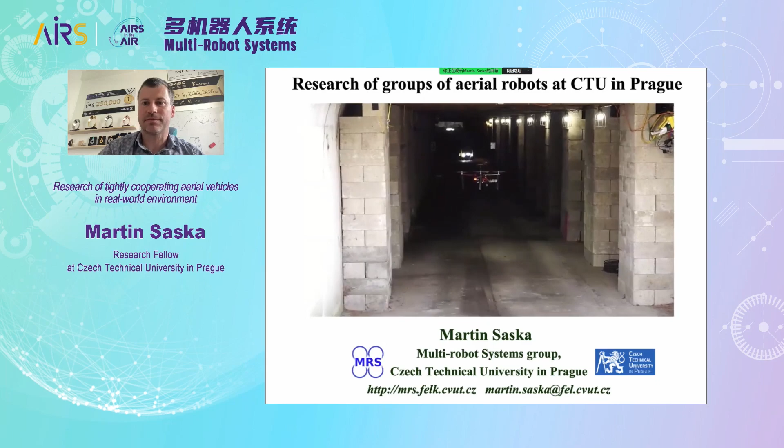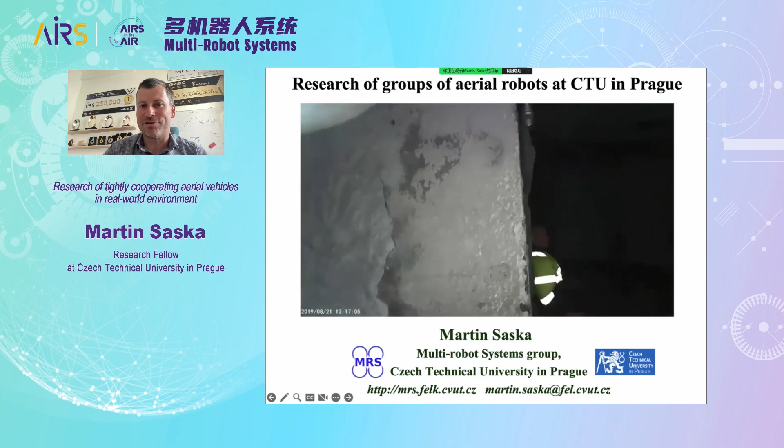Hello everybody, thank you very much for the nice introduction. Thank you very much for inviting me to this interesting workshop. I hope my presentation will be interesting for you, and you will learn something about what we are doing in Prague and what other researchers are doing in this field. So let me share the screen. I hope you see my slides and the video running. Can you confirm please? Perfect, thank you. Please, in case you have any question, feel free to interrupt me. I like to see if the audience is not sleeping and following me. These remote presentations are kind of, I don't want to say boring, but maybe more boring than being in person. So unfortunately I cannot be with you, I would like to be. Hopefully next time I can be in your place and present to you directly.

So let me start my presentation. As the title of my presentation says, I would like to show you briefly what we are doing in Prague in the research of multi-robot systems.

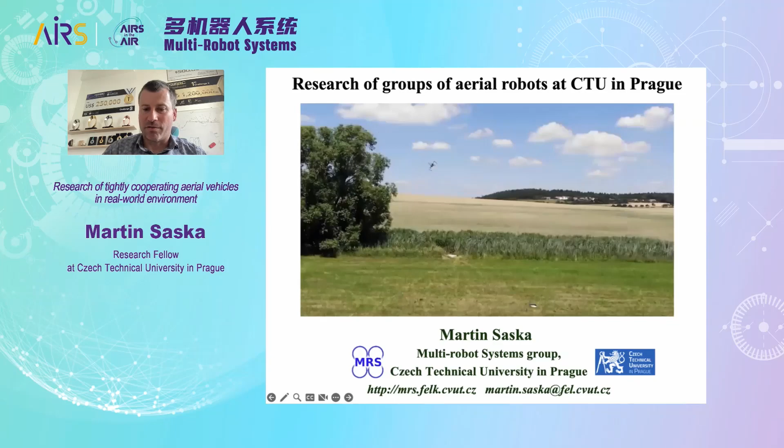I'm heading a group of... why it's not moving... okay, now I'm heading a group of 35 employees in Prague, plus we have a huge group of master and bachelor students. So altogether we are more than 80 people cooperating on our robots, and we have the ability to cover really all the disciplines required to build a complete system of fully autonomous drones.

So all the videos and all the pictures you will see, the drones are flying autonomously without any pilot, without any operator, even without communicating into a ground station. So they are really independent robots using onboard sensors, onboard computational power, and onboard artificial intelligence. And we try to deploy these robots into real world environments.

So we don't have even a flying lab where we could fly inside in our lab or even outdoor at our campus. We don't have any place purposely. We want to fly really in the real conditions. So we travel a lot to nature, to cities, to industrial complexes, always where the drones need to be deployed.

Here you can see also a kind of wall of fame. We are proud of successfully participating in multiple robotic competitions. I will briefly tell you about it a bit later.

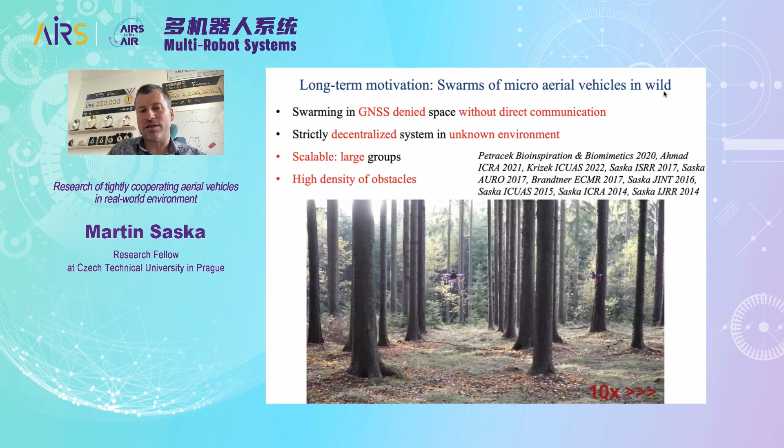We want to have our groups of robots scalable. Therefore, we try to apply bio-inspired methods. We try to be inspired by birds and fish schools and a flock of birds and insects, to use these principles to be able to fly similar to how these guys are doing.

I don't know why it's not so well working today. We are proud of our system. We have designed it for controlling multiple robots. We call it the MRS UAV system. It has now more than 600 active users. You can find details in this publication.

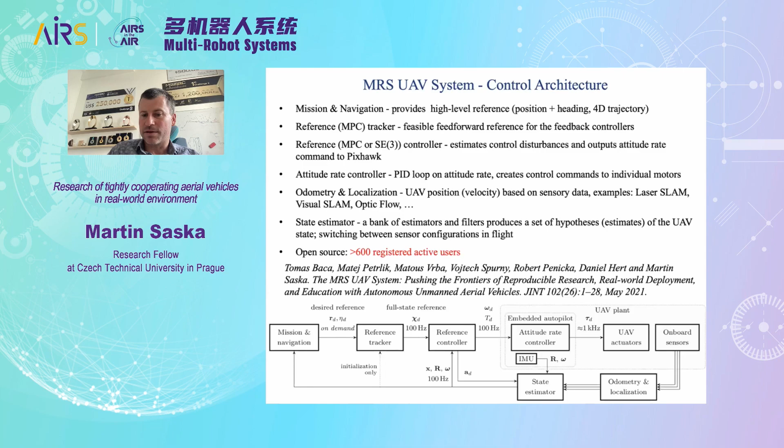Part of the system, or the main part, is the control part, where we have multiple controllers you can choose from. We are using the SE3 controller or MPC, model predictive control. We have embedded there multiple trackers for tracking of trajectories or desired references the drones are using. We have there also the possibility of fusing multiple sensors.

As I have mentioned, our robots are using onboard sensors mainly. So they can be equipped with cameras, 3D, 2D lidars, radars, a lot of different sensors, 3D cameras. And often we try to combine, fuse multiple of these sensors together to get a reliable output. Because the state estimation for the robots is, of course, crucial. The robot needs to know its state to be able to control it, and therefore our researchers are also focused in this particular area.

As I have mentioned, we have multiple controllers there, the MPC and the others. But I would like to focus on a unique sensor, a smart sensor we have developed here in Prague, which is intended for large swarms of robots in real world conditions.

We are using UV LEDs mounted on robots. We have selected the UV part of the spectrum because RGB cameras are sensitive to illumination. We have found, and you can see the example in the picture here on the right, that in the RGB spectrum, it's really difficult to find the drones around, even if you are using advanced AI methods, neural networks, and this kind of stuff.

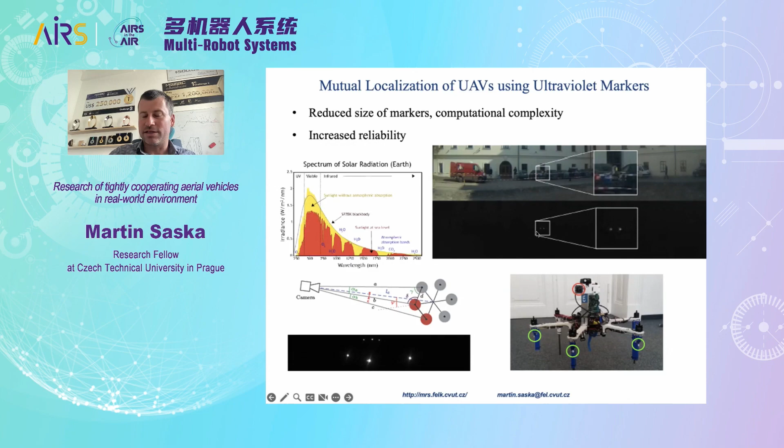Therefore, the sun is not providing this part of the radiation, and it's not reflected from the objects. That's why in this picture you can see really only these two bright dots, which is the drone equipped with this UVDAR system. So detecting these bright dots, we can simply detect the drones around, track them.

And even communicate through blinking of these UV markers. So we can have a simple indirect communication where each drone can blink, for example, their status, informing the other robots that the drone is landing and so on.

Another interesting research we are conducting right now is trying to use swarm intelligence for solving situations where one of the robots, or a few robots from the team, is kind of blind. So you may imagine flying above, for example, a desert where you have sand everywhere, relying on cameras. Obviously there are no obstacles in the desert, so you cannot use 3D lidars to localize the drone.

But of course, above the desert, there are places where the sand is consistent and you can't see any stones, anything, any object. In this particular situation, your drone would be completely lost, and you would even lose the state estimation of the velocity, which is crucial for the drone, and the drone would collide immediately.

But we have found that by using multiple robots in the team, and helping robots which are better localized help the poorly localized one, as you can see here, this robot can improve its own localization performance, and all the robots together can fly.

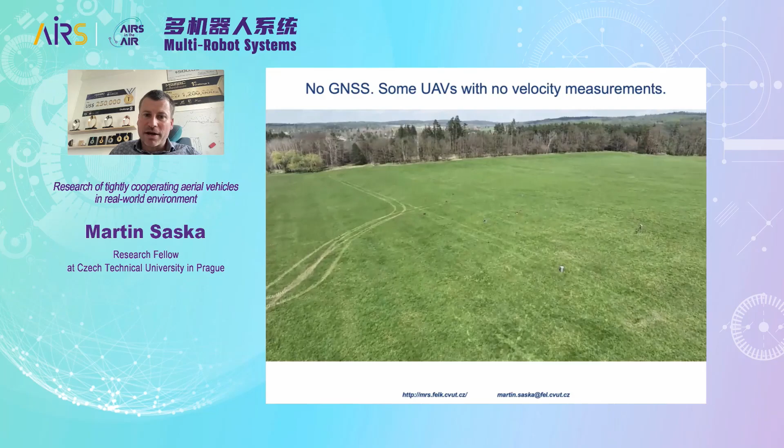So they are not using GPS, they are not using communications, they are just observing each other. We have even found some locations above this grass where particular drones are completely losing track - they're not able to be stabilized because the green under them is persistent and without enough visual features. But even in these regions, the swarm stays stable, flying really fast.

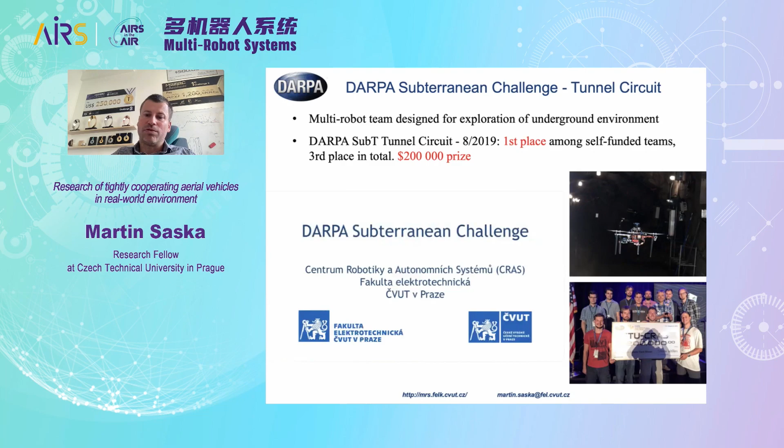And also, you can imagine that such a swarm is difficult to hack. For example, you can't spoof GPS because we are not using GPS, and you cannot spoof the communication because we are not using communication. It's really interesting research to exploit the fact that we are flying in the swarm to help the individuals.

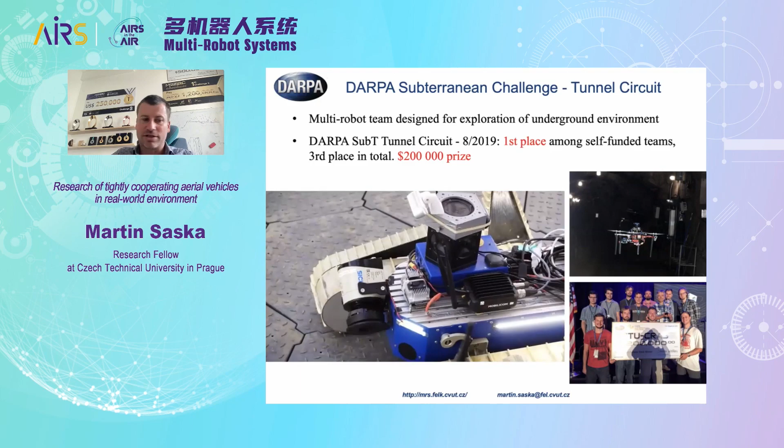Now let me briefly tell you some lessons learned during our deployment in the DARPA subterranean challenge. It was a really great challenge because it pushed the research to the edge. The aim of this competition was to find victims in an underground environment. We, as operators of the drones or ground robots, were not allowed to enter the environment at all, so we had to send our team of robots to go there and explore.

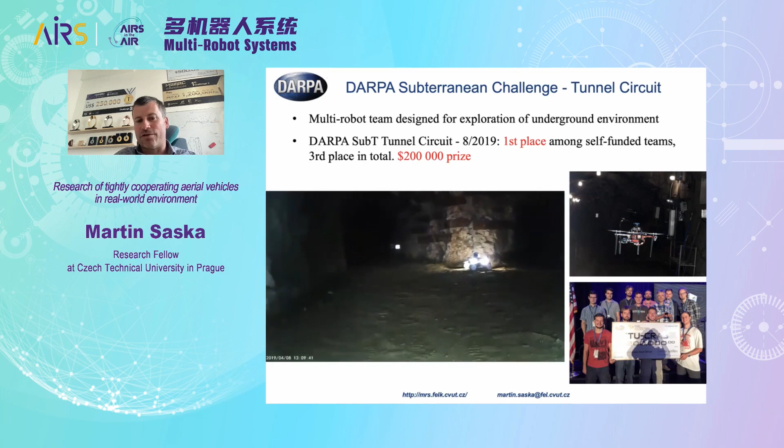We didn't even know what type of environment was in front of us - it was really unknown. Usually an unknown environment means you at least know you'll be flying in a forest, so you can prepare your drone beforehand, train your neural network for the trees around, and so on. But here we couldn't train anything - we didn't know if it would be a cave or a tunnel or how the environment would look. It was really a challenging task.

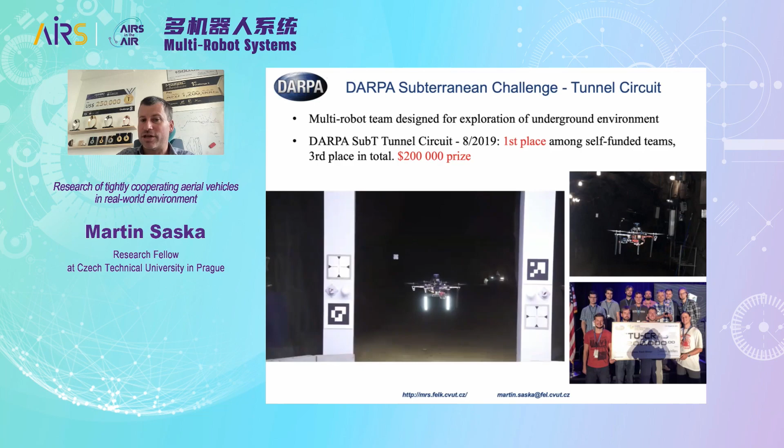We managed to win this competition among self-funded teams, and we were third overall. The same happened also in the second part of the DARPA challenge, the urban circuit.

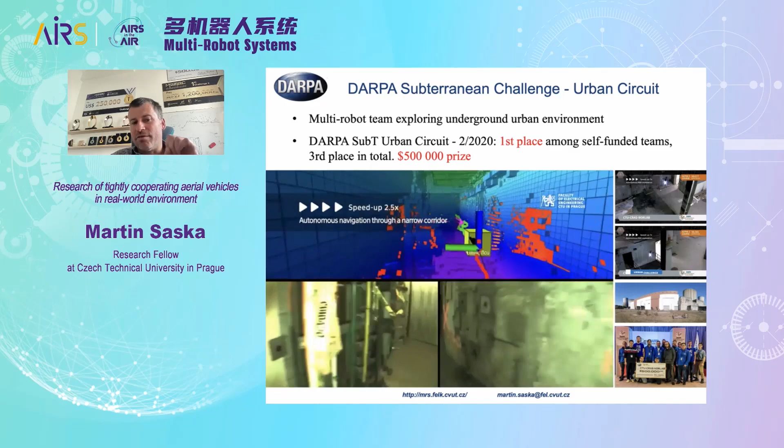It was again a similar example - we were targeted to explore the environment of a nuclear power plant. Our robots were sent into the power plant without a priori knowledge. They were flying there and we had to design the system so they were able to explore really tiny corridors, almost touching the walls with their props, as well as flying through huge areas of the power plant.

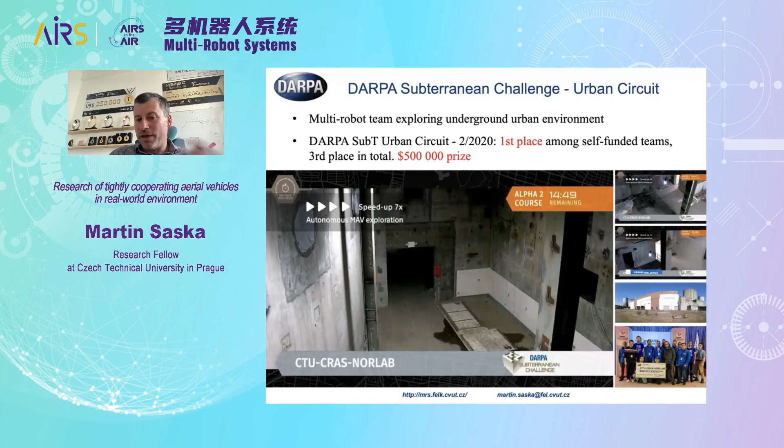So our system tried to adapt by itself just by observing the environment. This is a completely new view of robotics, where the drones observe the environment and change their behavior based on the environment's properties to be fast and efficient. In the final of the DARPA SubT, we were second overall in the virtual track, and this was really a great lesson we learned there.

It was the DARPA organizers - they built a special stage for us where the robots were deployed.

They built an artificial train station, as you can see here. So everything was built from scratch by them. They built a train station, a coal mine, and an artificial cave system. So we sent the drones there, and the drone flew into a metro station, then continued to a mine, then there was a cave. So it was really, really heterogeneous system for being deployed in heterogeneous conditions.

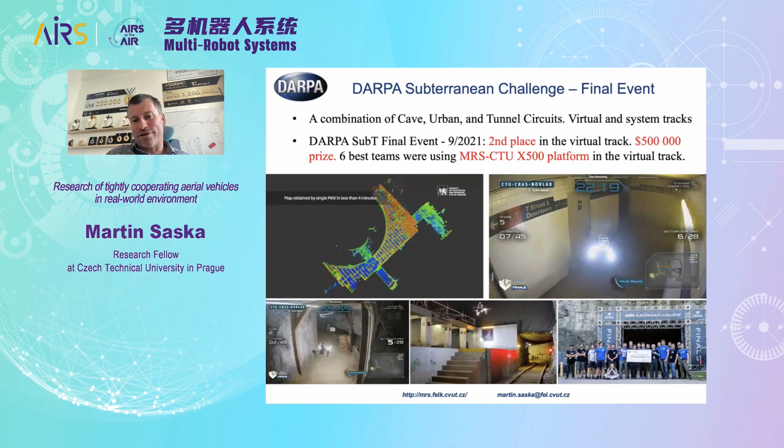So it was really something which pushed a lot the robotics, and we could see even in observing the other teams that the key issue was to design a really reliable system. So this is our main research intention right now, to build drones which are really reliable, which kind of never crash. Of course, this is a difficult task, but we try to go forward.

So as I said, the DARPA SubT challenge was really pushing the state of the art of robotics. So we managed to have a lot of publications in the best journals in our field out of the competition, which is great. And we managed to have also a lot of industrial outcomes.

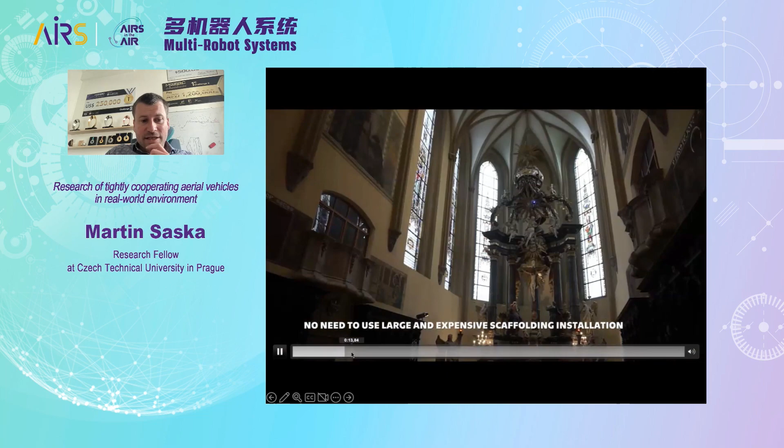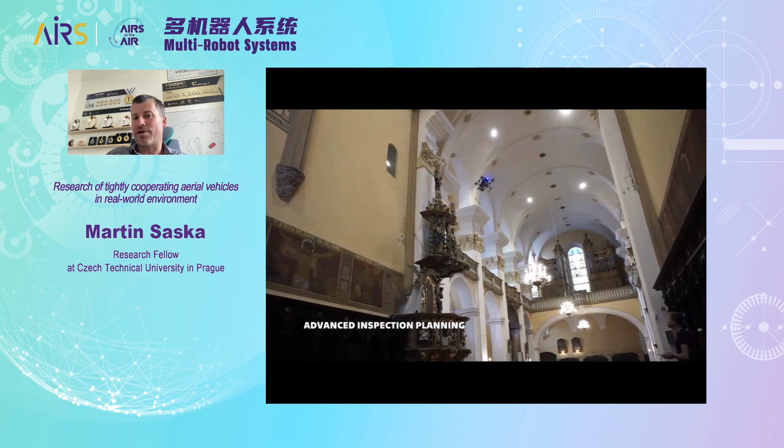The nice thing is that we have even found some applications where multiple robots being deployed simultaneously is necessary. So here in these examples, you can see that the object has insufficient illumination, the lighting there is not sufficient. So we have to deploy a team of multiple robots where one of the robots is carrying a camera, flying completely autonomously in the church, and another drone is forming a formation with the main one, carrying a light. The advantage of such an approach is that you can point the light from the side, so you don't have to put the light on the same drone as the camera, which makes much better quality of pictures. Of course, we are using also 3D models scanned by the drone.

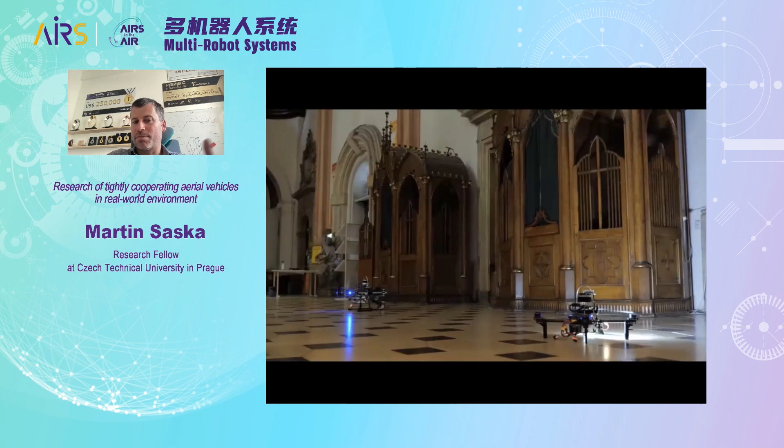These 3D models are used for the end users to plan the mission. Of course, here in this particular application, the drones are not flying randomly in the environment as it was done in the DARPA SubT, but they have to follow a predefined set of locations to visit and to make a picture there or to scan the object there.

So this was the outcome of the DARPA SubT. Now let me briefly go through the MBZIRC competition, where we have also successfully participated. In the first round of the competition in 2017, we won one of the challenges, so we were first place in one of the challenges, and we were second in the second challenge. Here in 2020, we were first in one of the challenges, we were second in another challenge, and we won the competition entirely. So we were the best out of the 250 teams from the world.

Even a lot of teams from China participated. One of the teams from Beijing was really good, they won one of the competitions, we were second behind them. So congratulations, I have to congratulate the guys if they are here as well.

The challenges were to capture and neutralize an intruder UAV, and then to build a wall from bricks, and also to extinguish a fire. Again, all these challenges were pushing the limits of robotics, therefore we could publish a lot. So if you are interested in details, feel free to see these publications or let me know and I will send you the PDF.

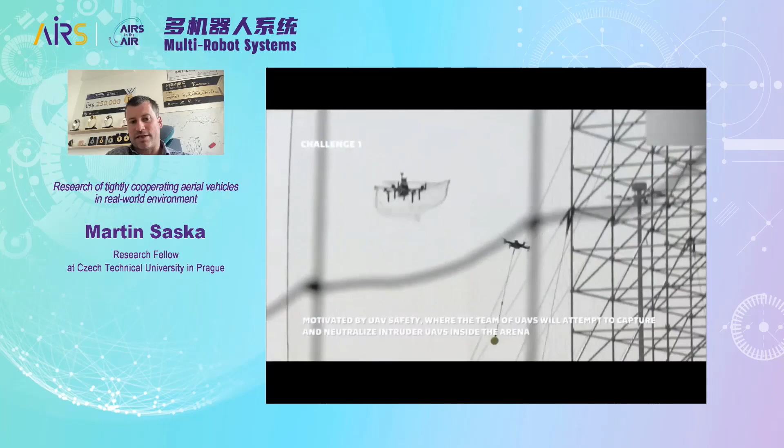Yes, so as I mentioned, it was really a lot of publications we achieved from this competition. Here are some pictures from the competition. So as I said, one of the first challenges was capturing some flying objects and also static objects, so the balloons and the flying objects here. The task was to capture this really tiny ball which is carried by the drone.

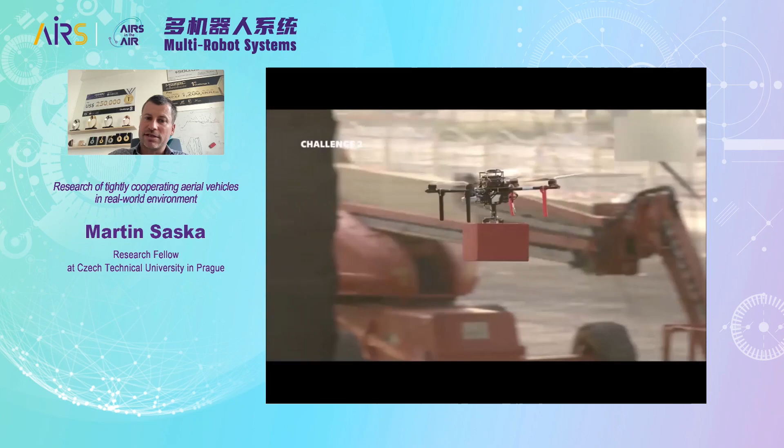The second challenge was to build a wall from bricks, fully autonomously. The drones were equipped with a magnetic gripper to grasp the bricks and place them in the given locations. You can see the wall here where the bricks were placed. Everything was autonomous - we couldn't touch the keyboard or controller. The drones were flying really without any help from humans.

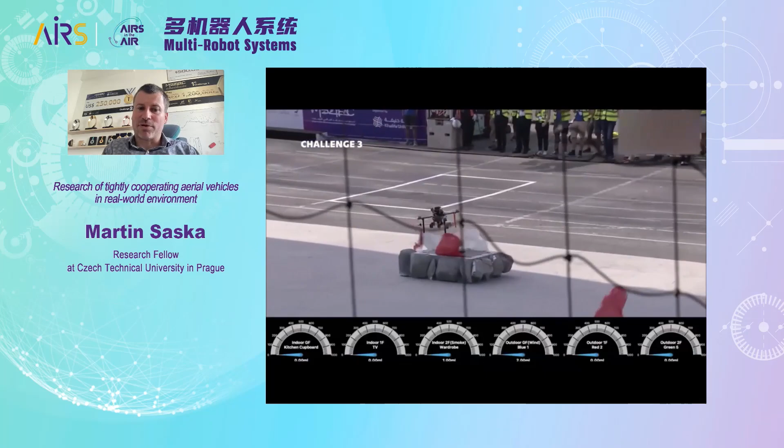The last challenge was firefighting of high buildings. I believe in China you have these problems as well, as they have in Emirates, in Abu Dhabi, where the competition took place. So it's obvious that we have to fight fires in these tall buildings.

The competition motivated several companies. They contacted us, and we are now building firefighting drones, which are not toys like you could see before for the competition, but carry real systems for firefighting. Here you can see one example of such a drone.

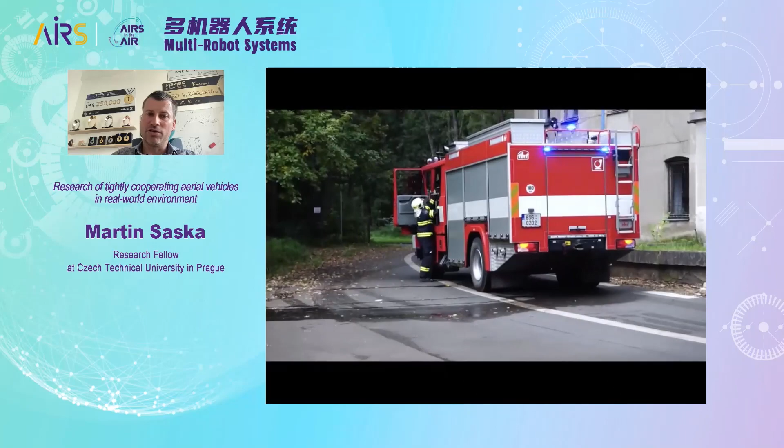This is a small model of a fully autonomous drone used for firefighting. It's a small-scale model. The drone is carrying only one capsule of the firefighting system.

But we could demonstrate with the firefighting brigade that we are able to autonomously reach the location, detect the window with the fire, and put the device for firefighting inside, fully autonomously.

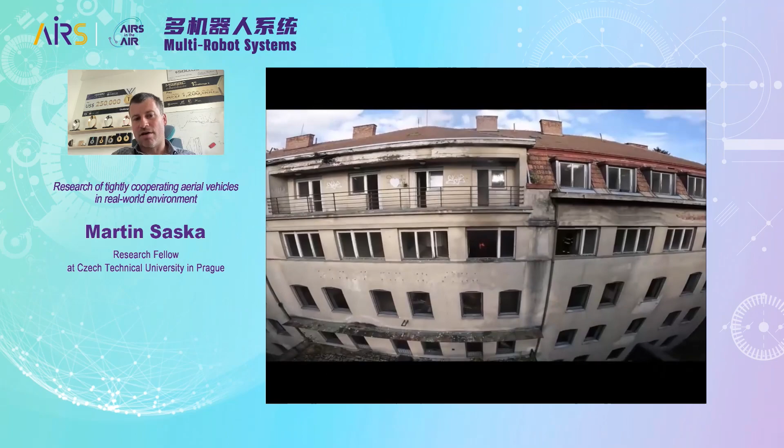So the drone is shooting these capsules with a special liquid into the fire autonomously, just by observing the heat source of the fire. The drone is equipped with a thermal camera and shoots it at the target.

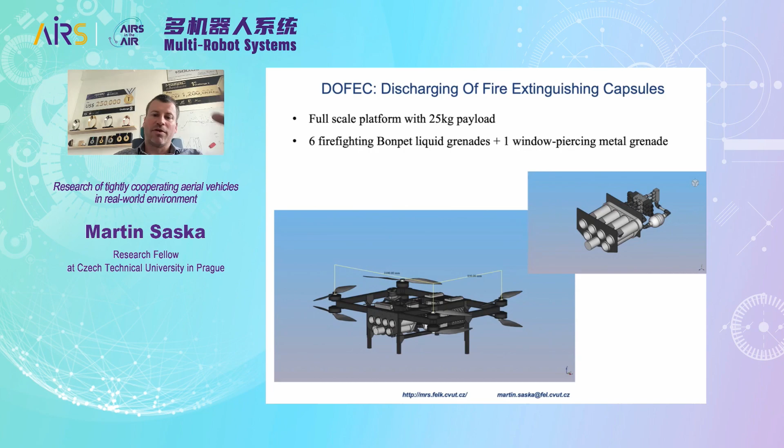Another example of deployment of our technology into industry, motivated by the competition, is a drone used for capturing non-authorized drones. This drone is intended to protect airports or important buildings like nuclear power plants, or even to protect the privacy of rich people or celebrities.

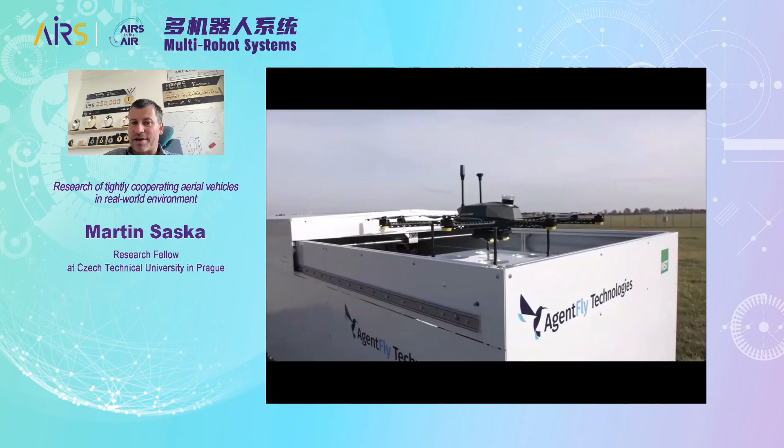Here it's an intruder drone - a DJI Mavic flying into the area. The drone is detected by an external system consisting of 3D LiDARs and antennas to detect the communication between the pilot and the drone. Once the alert is triggered, our drone hunter, Eagle 1, launches from the heliport, approaches the target, and catches it safely.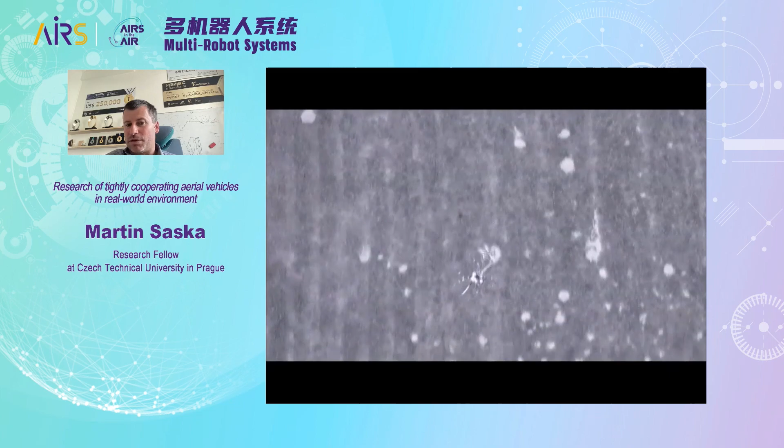In comparison to other systems which shoot drones down or use birds or whatever, our system is really safe for the environment, for other people around or other objects, because the drone is caught and carried by the Eagle 1 to a safe place.

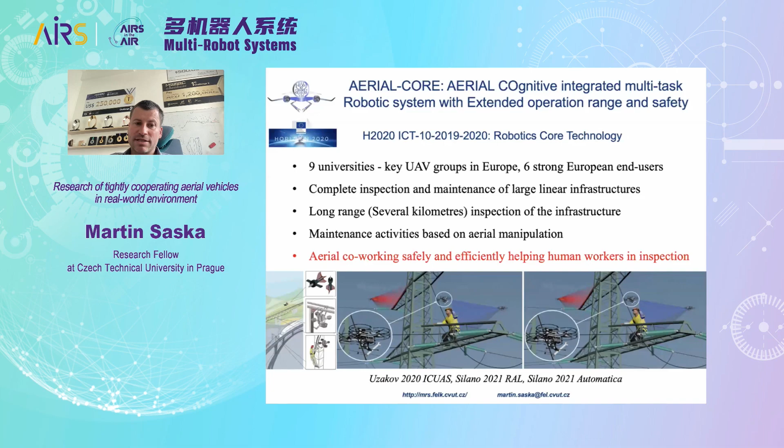So this was the Eagle 1 project. This is another project we are working on - inspection of power lines. I will rather skip this one because I want to show you a more interesting one at the end.

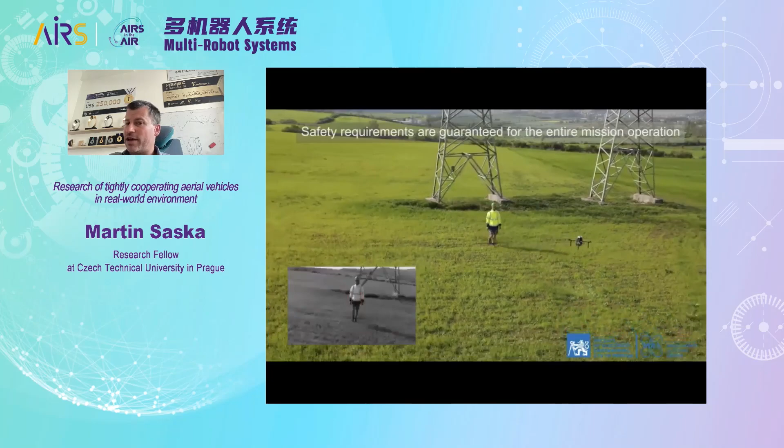But we have already achieved a lot of interesting results. We are even deploying a system able to cooperate with humans - this drone is tracking the human, even observing gestures, to be able to cooperate. In my vision, the cooperation of drones and people is in the near future, because the system is already there. We have ChatGPT, we can already communicate with a robot easily by voice.

Or even by sending messages, or using some gestures, as we are working on. So this is, in my opinion, the future of robotics - not only humanoids as it is now, but drones too will closely cooperate with humans and share their environment.

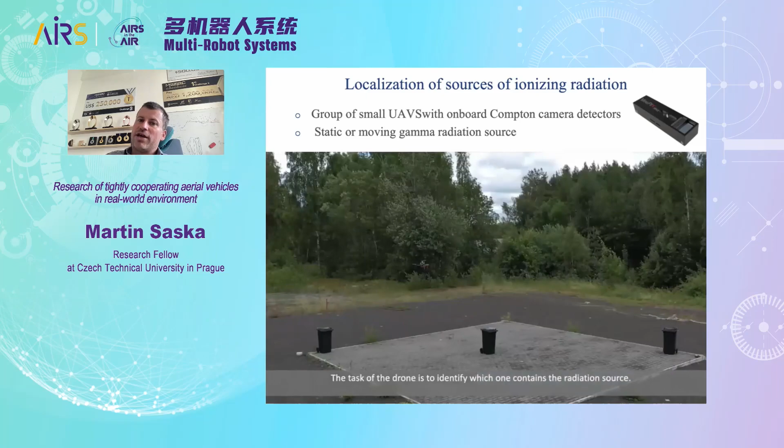Another project I would like to mention is localization of sources of ionizing radiation. You can imagine a source of radiation which is stolen or used for a terrorist attack, and it needs to be found as soon as possible.

We have designed a system using multiple robots to detect and track these dangerous objects using really small Compton camera detectors carried on board. So even with this extremely small but powerful detector, you can localize a large or small object of radiation.

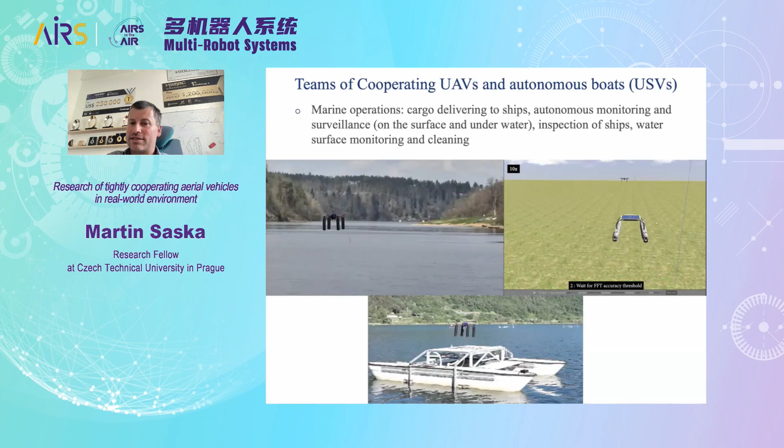Another project we are working on is focused on marine operations. We are designing a system for cooperating boats and drones, able to land in really difficult conditions with waves.

Here is some testing we did in our lakes, but we also did a lot of testing in the real sea under real wave conditions. We showed that we are able to control the boat, of course this is easy. We are able to cooperate to control both the drone and the boat together as a pair, and estimate the position of the boat for landing. We can land also on the water, as will be shown here, but this is easy.

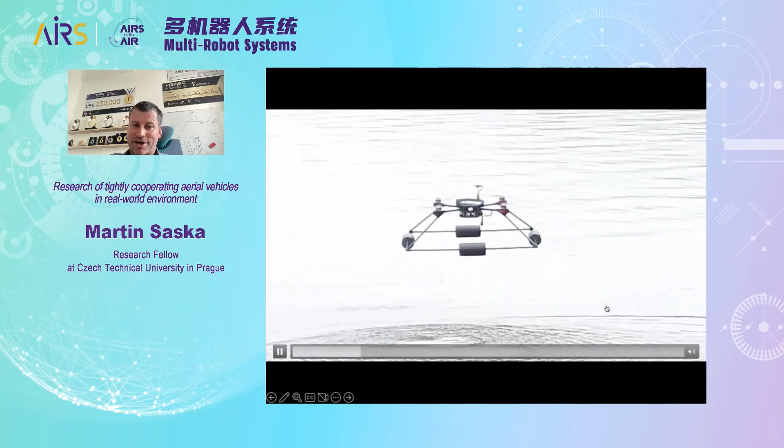But landing on the boat, if it's affected by the waves, in really difficult conditions like this rain you can see here, this is the challenging task. I wanted to show you at the end the successful landing, but I believe you trust me. So at the end, you can see how we can land.

I want to also show you that if you would like to use the system we are designing, you can, everything we are using is open source. You can follow us on GitHub and use all our codes, but you can also use our drones if you like them. Just simply follow this link, dronebuilder.flyforfuture.com, and you can build your drone in this kind of e-shop. Then we will help you with assembling the drone and prepare it ready to fly. So it is kind of easy for you to get a ready to fly platform with software.

Another announcement I would like to make is about our summer school, which we organize every year in Prague. It is focused on multi-robot systems. We usually have 8 excellent professors from the best universities worldwide, and a lot of students from excellent universities as well. I hope you can still join us in July this year. If not, next year there will be a repetition for sure. Last time we had 240 participants.

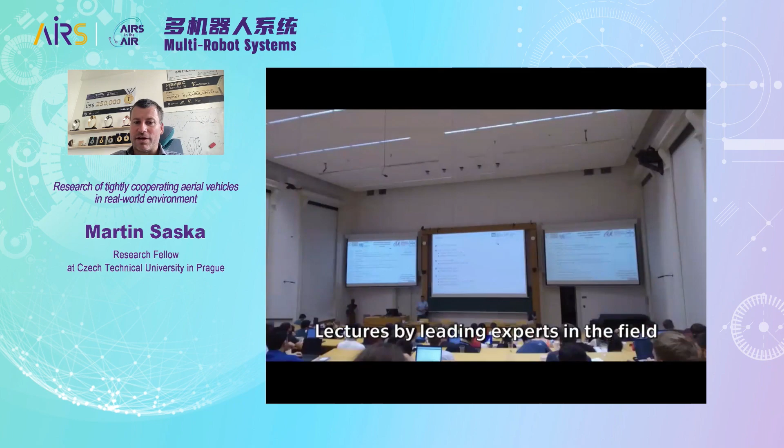The interesting part of the summer school is that all the students fly with real drones at the end, doing experiments with the robots. The final day is kind of a competition where they get our drones and have to solve some tasks. This year, the task will be motivated by inspection of solar power plants, the panels of the power plants. It's useful to do it by drones, but by multiple drones cooperatively.

During the summer school, we have a lot of seminars, as you can see here. We really push cooperation between the robots. We have lectures and also practicals. So during the summer school, students gain the knowledge of how to fly a real drone, not only a single drone, but a swarm or formation of real drones that are cooperating.

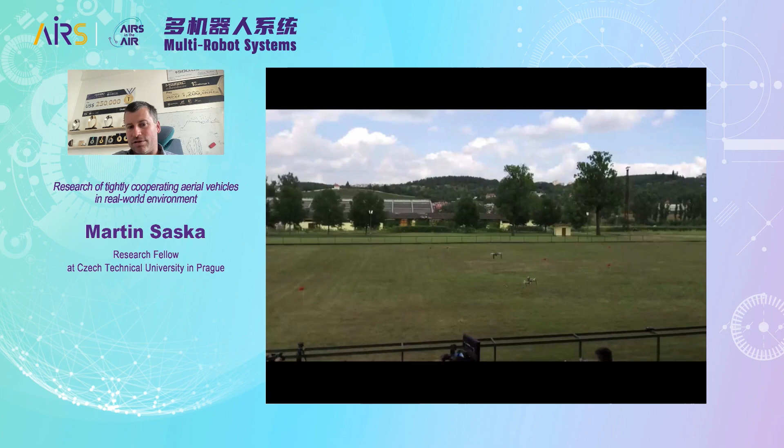These are pictures from one of the final competitions where the drones were targeted to detect flags. We placed 20 flags into the environment, and a team of 2 cooperating drones, programmed by students, were able to detect even with 3 drones as you can see here. They were able to detect the flags. It was very successful for the students.

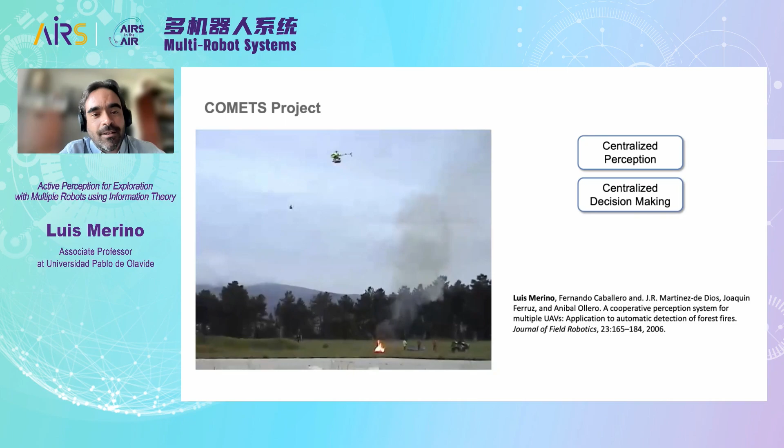At that time, there were no quadcopters—we were using, they were not even called drones, we were using RC helicopters and blimps. But we were able to demonstrate that the vehicles had operational autonomy; they could move to waypoints autonomously, fully autonomously, in this case using GPS. The idea was that by combining the information from all the vehicles, we wanted to estimate this situation of the fires.

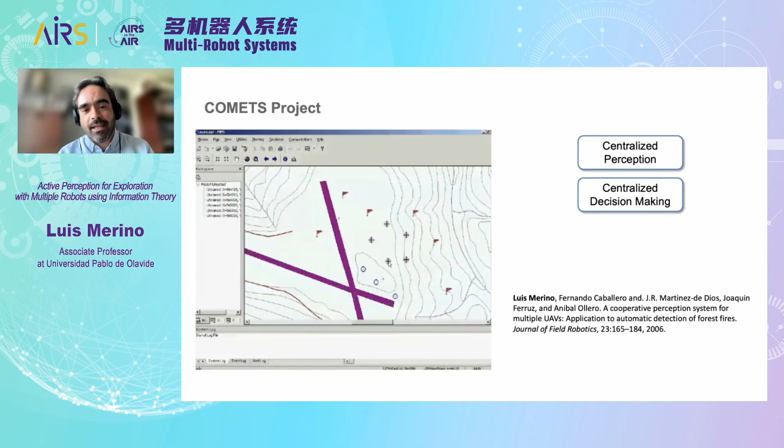One important point here, relating to the former talk: while there was some distributed operation, some processing taking place on board the vehicles at that time, we're talking many years ago when basically all the processing and data fusion combination happened in a centralized way. As Martin just said, this is very problematic because first it's not scalable, and the centralization is a critical point that if it fails, everything fails and nothing can happen.

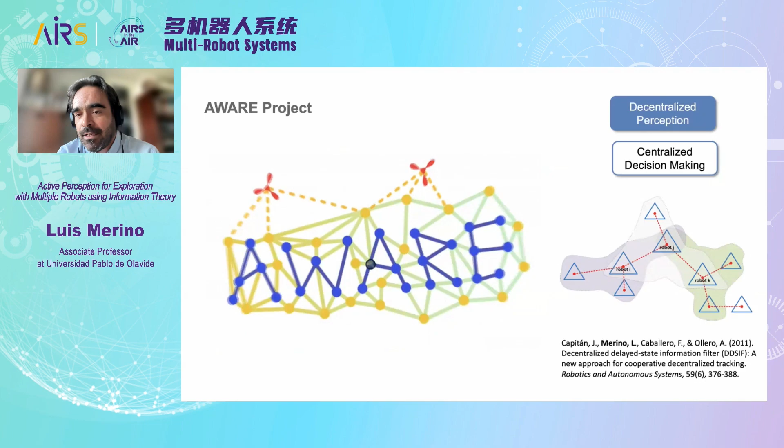In the following project, where I was participating and now directing my first PhD student, Jesus, we first moved to having decentralized perception. I wanted to use this slide to present what I mean by decentralized. Basically, a decentralized system is one that relies only on local perception and, if so, local communication with the neighbors. You don't need or rely on any broadcasting facility - you can only communicate locally with your neighbors or with yourself, so to say, only local communications.

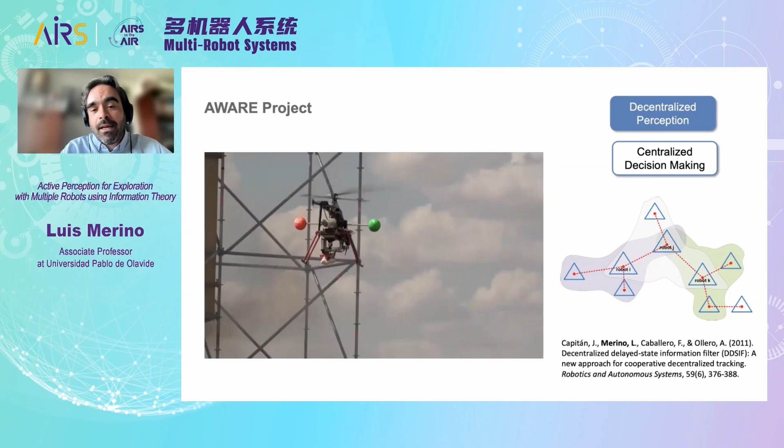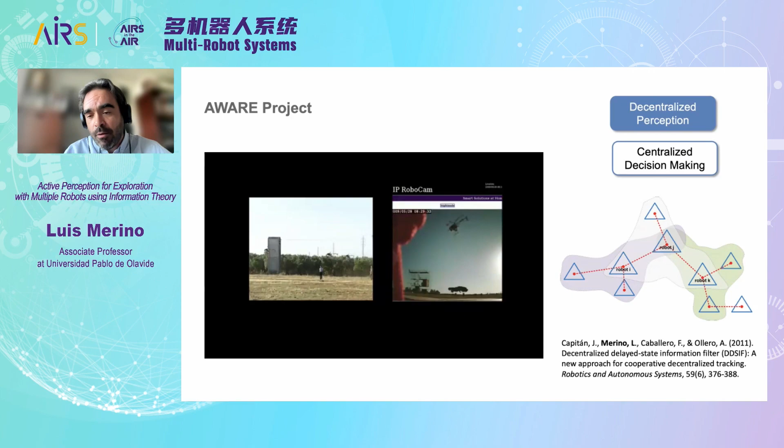In this project, the application scenario was also a kind of emergency scenario in which we had to fight fires in a kind of building. There was a fleet of vehicles there, and among other tasks, they had to estimate the position of the firemen using cameras and other sensors deployed there. What we did was develop a perception system that was decentralized, in the sense that using only local communications and local perception, it was able to estimate a very similar final result, a final tracking, as compared to a centralized system.

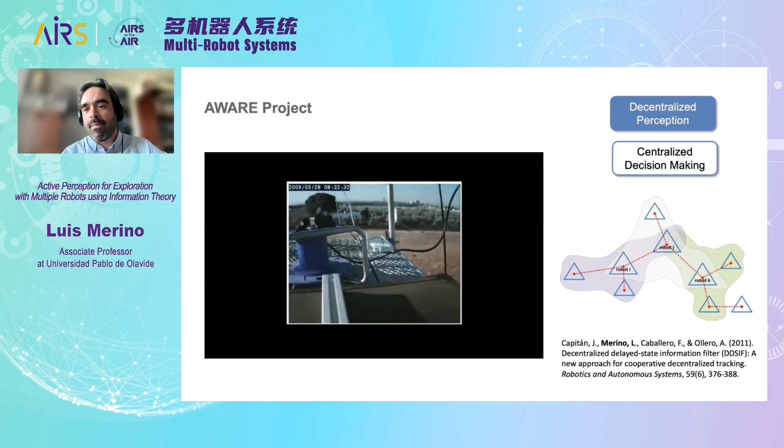Actually, in the linear case, we demonstrated that it was exactly the same estimation, and in the nonlinear case it was an approximation, but still using this decentralized approach. Decentralized systems are very convenient because they scale much better and they are much more robust to disconnections, because the robots can still work together even if they don't have connection with the rest of the fleet.

After that project, having worked on decentralized perception, we then moved to the next step because decisions were still taken centrally. So we wanted to also decentralize the decision making, and in particular to be able to reason about the uncertainties present in any real problem, because either you have problems with the sensors or you have occlusions, etcetera. This is the EC-SAFEMOBIL project, where we moved in that direction.

But we wanted to reason about this, because we can have models, and we wanted to reason about the uncertainties there. For that, what we did was use partially observable Markov decision processes, or POMDPs, so that we can take decisions under uncertainty. In the system, each UAV was working on its own, using information coming from the others, using the decentralized data fusion system I mentioned before. They were able to reason about uncertainties in order to, whenever a car went into the tunnel, decide: okay, I know something will happen here, but I don't know if the car will go to the other part or go backwards. This was a kind of adversarial scenario.

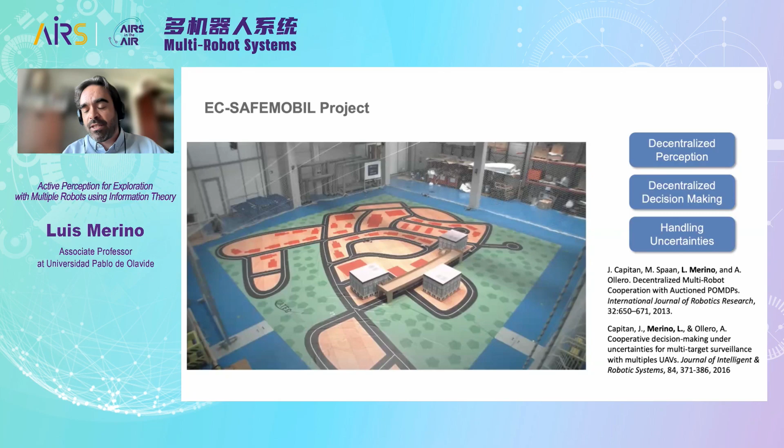Finally, in this historical view of our contributions, we also participated in the MBZIRC challenge, in this case in a joint team with the Polytechnical University of Madrid and the Poznan Institute of Technology in Poland. I think Martin already presented the challenge, so I won't repeat it.

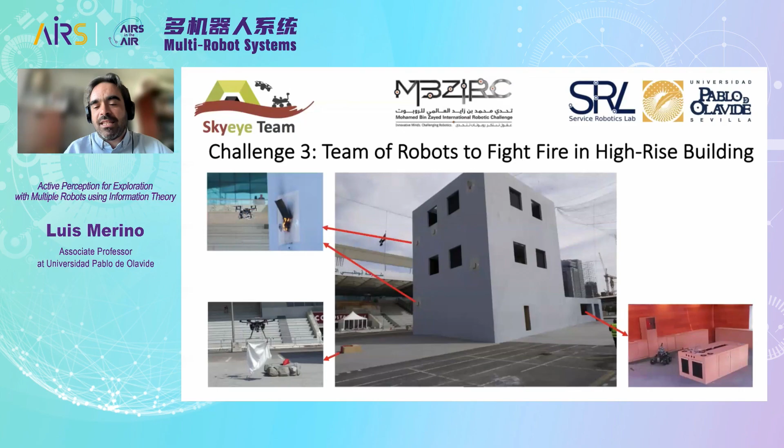In this scenario, a team of robots had to collaborate in order to put out fires in a mock-up of a building they built. They simulated fires using different components, like red silk, but also with infrared emitters, and also with real fires using gas, as you can see here. We used a team of robots, including this ground robot and other aerial vehicles.

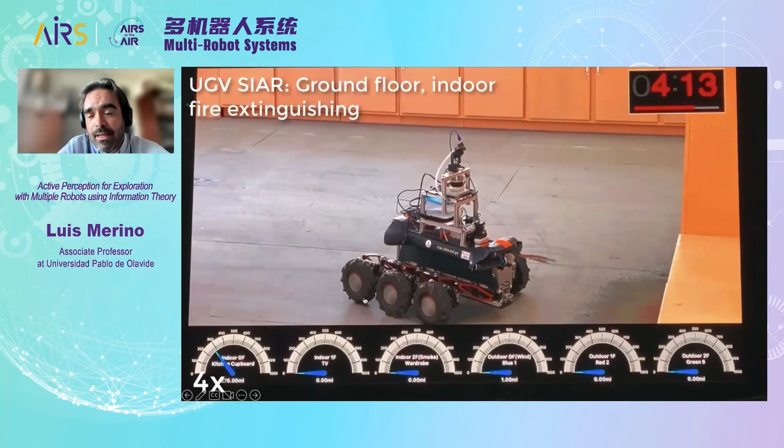For this, we used a team of robots, and they had to collaborate in order to extinguish the fires, either with water or with fire blankets. Again, as Professor Saska said, we followed the same approach - we had a really decentralized system.

Each robot was working on its own, and they only collaborated very loosely because we had task allocation. So each robot was tasked with a different task - extinguish a fire on a facade, or extinguish the fire inside, or extinguish the fire outside. So there wasn't that much collaboration.

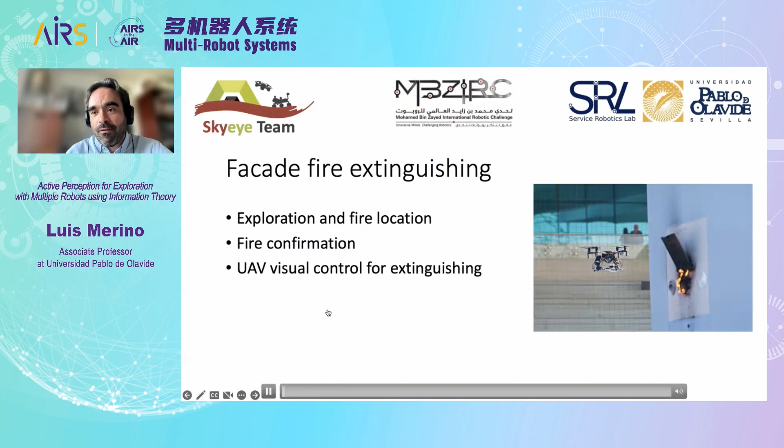But I wanted to use this example to introduce the main topic of the rest of the talk, which is about exploration. One of the things we needed to do is explore - in this case, the drone was exploring the facade of the building, looking for a fire, and at some point it finds the fire and reduces the uncertainty on its position.

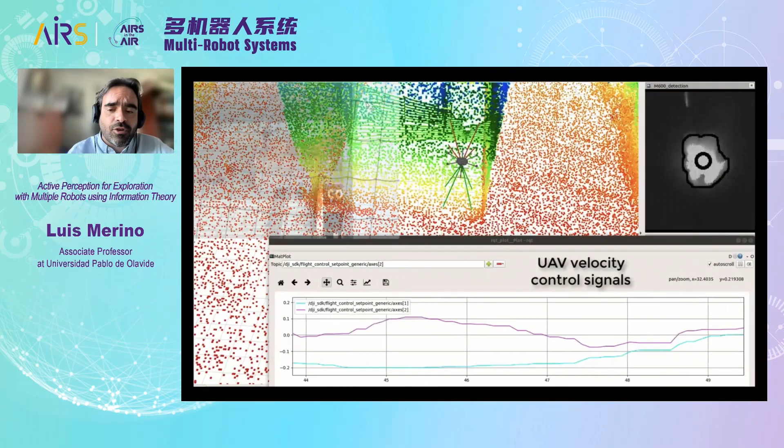Whenever the uncertainty was below a certain level, we switched to attack mode, and then we just controlled the drone visually. What you see on the right-hand side is the infrared image from the drone, and we used visual control to guide it. Hopefully you can see here how the drone was putting water into the fire.

So one of the topics for the remainder of the talk will be this exploration. When we need to map or determine the location of something in an unknown environment, we want to see how we can do this in a clever way. This will be the main topic of the rest of the talk, and it was not considered in the former works I just presented.

This work has been carried out in collaboration with the German Aerospace Center, the DLR, with Dr. Dimitri Shutin's group. The work I'm going to present now is also the work of my collaborators, my PhD students, Alberto and Valentina. Let me introduce this exploration problem, and I'll present briefly some solutions we have developed for it.

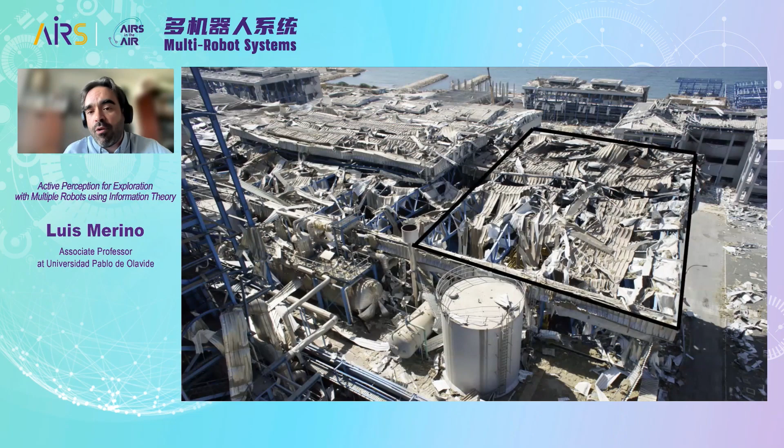Imagine we have one of the scenarios like the ones presented before, or this one, which is a real photo of a gas power plant that exploded. In this kind of situation, we may be interested in exploring one part of it, for instance to map the concentration of gas. We'll be talking about exploration of spatially distributed processes, like gas concentration or radiation concentration, or radio frequency signal power, or anything like this.

From the former examples, it should be clear that in these applications robots are a very interesting tool, because they may access places that cannot be accessed by humans, and they can be very fast, particularly in the case of drones. The idea is that we would like to plan clever paths in order to map all these spatial processes as efficiently as possible.

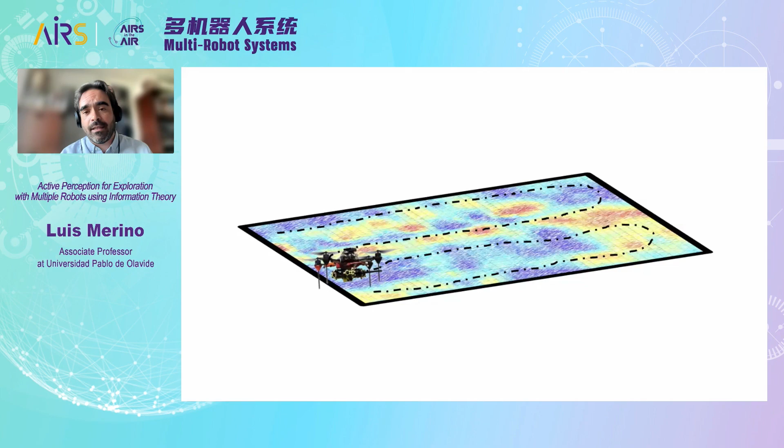These kinds of problems render very adequately for multi-robot systems, because if we have several robots, we can do this even more efficiently - they can share and divide the task, ideally dividing the time needed to explore the whole thing by the number of robots.

Again, what we want to do is this in an efficient way and possibly in a decentralized way, so this can scale and is robust to disconnections and lack of communication. In particular, the objective here is not only that, but also to reduce the uncertainties as fast as possible. So for the remainder of the talk, I'll present the main components of active exploration systems in the single robot case very briefly, and then give some ideas of our system and how we extended this for the multi-robot case.

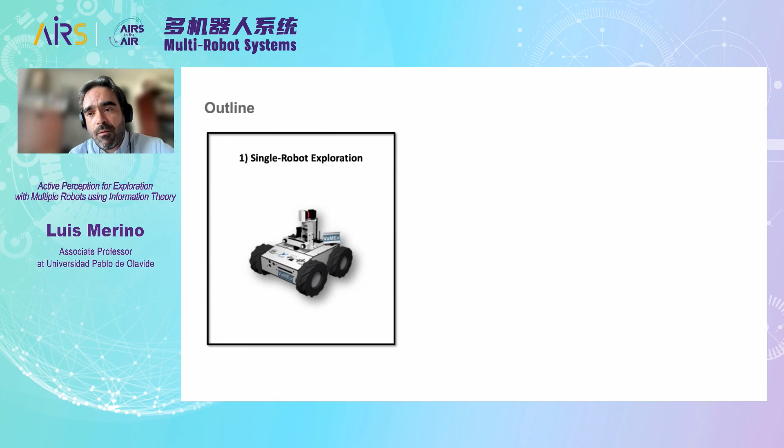Assumptions for the algorithms I will be presenting here are the following. First, we will consider situations in which either we have some kind of external localization system, like access to GPS, or we have a localization system in which the uncertainty can be neglected. In some cases this is too strong an assumption, but we will be focusing more on the exploration part here. We'll also assume that we know the obstacles in advance, and we want to explore a spatially distributed process, but we will assume that this process is time invariant.

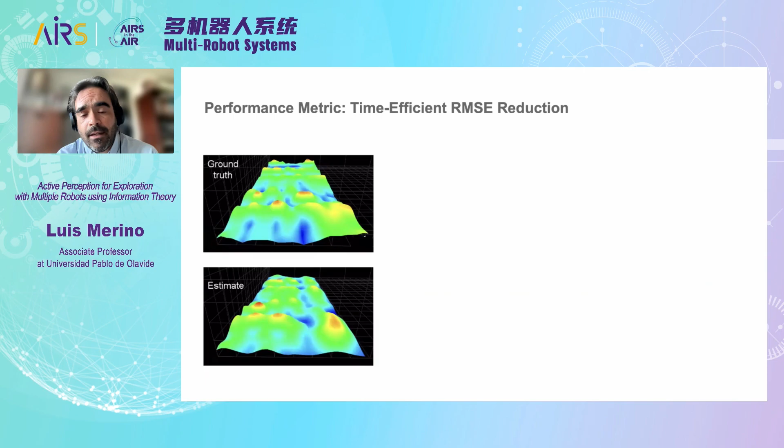Let me present for the single robot case the typical algorithm for model-based information-driven exploration. Imagine we have a drone, and we want to map some spatially distributed process, for instance a height map, the height profile of a scenario. The typical loop for this information-driven exploration would be the following: we take measures with the sensors, for instance sonar or LiDAR or whatever. Then with these measures we update any model we use of our process. With the model, hopefully we will be able to compute some information metric that allows us to estimate the amount of information we will gain by measuring in new positions, and then we will move to the highest informative position. So this is the typical loop, and then we repeat.

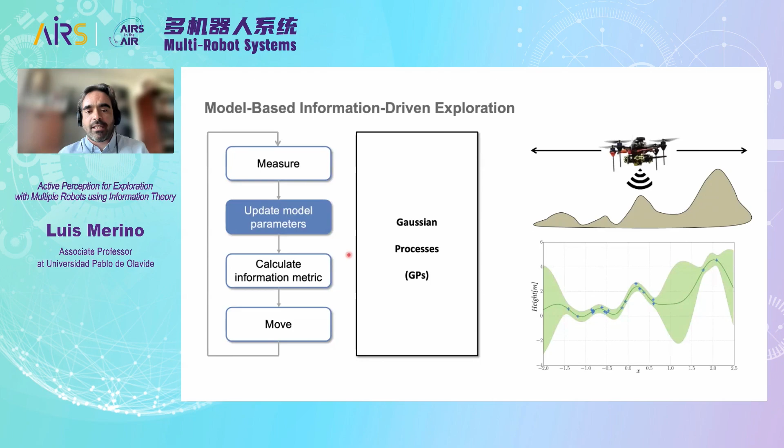Regarding the model we have been using for these kinds of applications, we are using Gaussian processes. I guess most of you are familiar with this, but for the sake of completeness, I will briefly summarize what a Gaussian process is. A Gaussian process is a non-parametric model, a collection of random variables, and the idea is that any subset of random variables of the Gaussian process has a joint multivariate Gaussian distribution. A Gaussian process is fully specified by two functions.

The mean function basically encodes any prior information you have about the values of the process. Typically this is set to 0 in our setup, but if you have any previous information, for instance a previous map, an old map or something, you could use it. The second important element is the covariance function, which for any two poses gives you an idea of how correlated the measurements taken in these two positions will be.

Typically you can use different functions for that with different hyperparameters, but for instance here you can see the typical covariance function, the square exponential kernel, which basically tells you that any two points separated more than this typical scale length will have measures that are uncorrelated. The correlations will decrease smoothly with the distance between the points. But you can use many other kernels depending on the type of process you are measuring.

The interesting thing about Gaussian processes is that given some measurements you already taken, which we represent by X and Z, so you have, for instance with your robot, explored a little bit of the process already, you can make predictions on the values of the process in places you have not visited yet, represented by X star. And more importantly, you can not only predict the value, but you can predict the uncertainty you have, the covariances over the places you have not visited yet.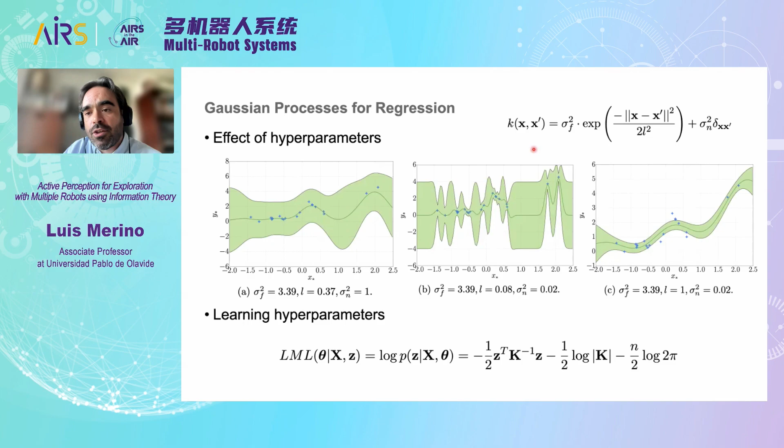But if we have this model, we can use this predicted uncertainty to determine the informativeness of new points to visit. Typically what is done by many people is to use the entropy given by the Gaussian process. Since we're talking about Gaussian distributions, the entropy is directly related to the determinant of the covariance matrix for a multivariate distribution, or the variance directly. So the idea with this type of method is that if you go and measure in a place where you have a big entropy, you will have a big reduction of uncertainty, so a big information gain.

So this initial algorithm, which is greedy, will typically do that: it will go directly in each step to the point from the action space that has the highest entropy. For instance, we applied this in some experiments for mapping the magnetic field of a room.

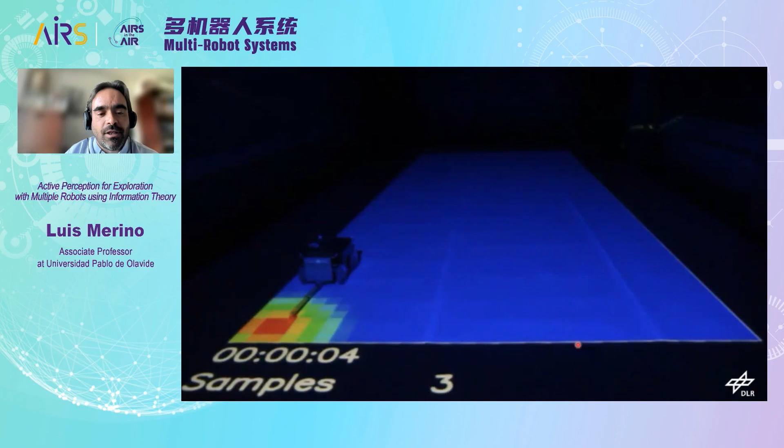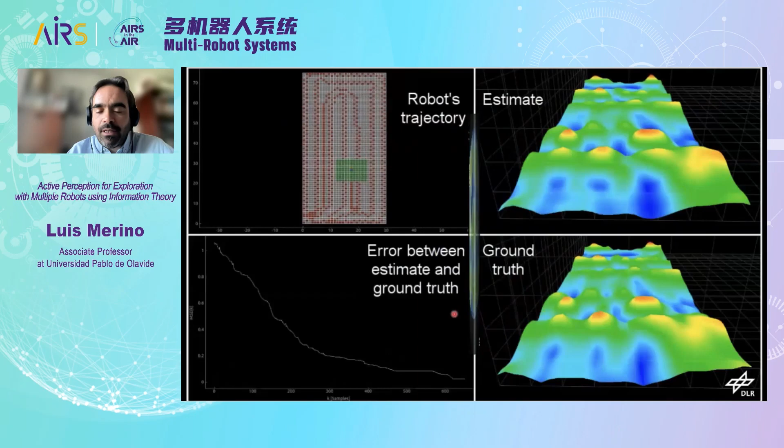We have this omnidirectional robot here with this sensor, a magnetic field sensor. You see the kind of trajectories you will get. In this case, at each time step, the action space is just the 8 neighbors. We discretize the action space, so the robot can go ahead, backwards, to the sides, or to the diagonals, and it will select from all these 8 actions the one that goes to a point with the maximum entropy among the 8 points. You will see how the robot is able to explore and map this magnetic field.

These kinds of algorithms can be very quickly expanded to the multi-robot case. One way would be just to deploy the same algorithm in each robot, so each robot applies the same loop: we measure, we update our Gaussian process, we compute the information metric for any of the actions from our action space, and then we carry out the action that maximizes this information metric, for each robot.

Of course, if we do it separately, the robots will just be repeating the same job. But if we allow some communication between them so that they can share measurements and compute the same Gaussian process, then there will be an implicit coordination because they are reasoning about the same Gaussian process. And if we share also the positions of the robots, then they can coordinate in order to avoid collisions and so on.

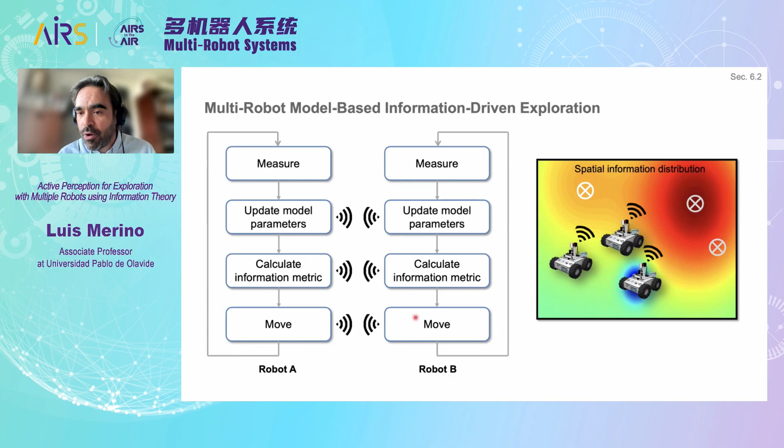very close to each other, to avoid collisions, as I said before.

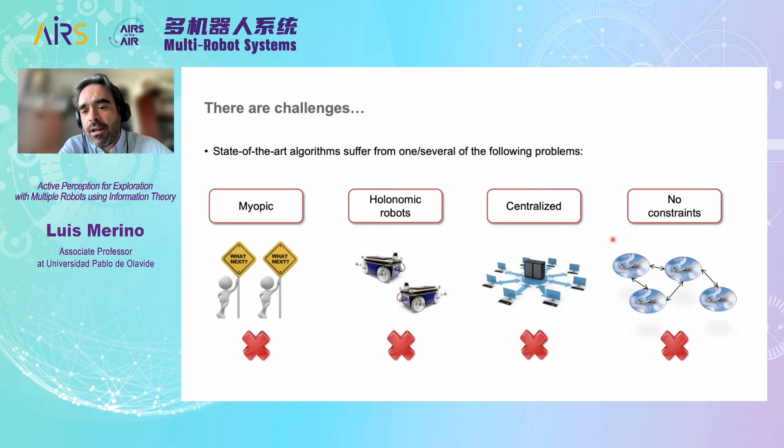Furthermore, the approaches presented cannot deal with complex constraints, which I'll mention in a minute. So what we developed in this project, in collaboration with DLR, is a multi-robot exploration algorithm that is non-myopic, so it plans. It can be applied to different types of robots, taking into account their kinematics, like fixed-wing aircraft or car-like robots, that performs distributed decision-making and can handle inter-robot constraints.

And what kind of constraints? Of course, avoiding collision between the robots, but also, in some applications, we want to maintain a network connecting all the robots - not a mesh network, we don't want all-to-all communication, but we want to create a network so that even using multi-hop, any robot can communicate with another. This could be needed in some application scenarios. So these are the constraints we wanted to consider in this approach.

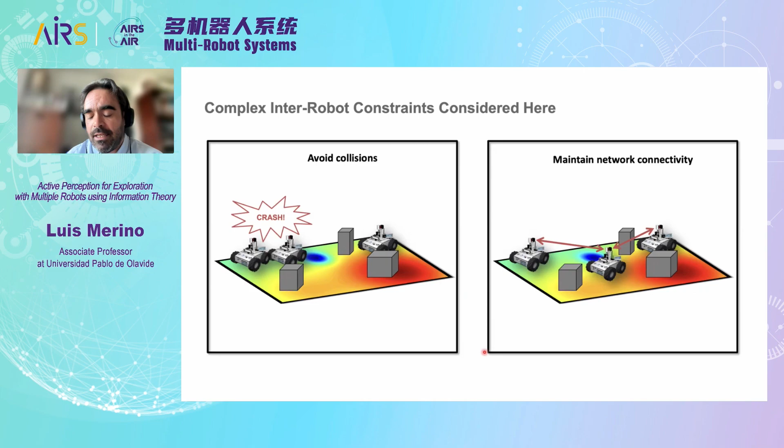So in order to tackle all these challenges, I will show how we expanded the former simple exploration algorithm and its main components. On one hand, we now want not to take the greedy next action - we want to plan informative paths. The framework we use to plan paths is RRTs, which I guess are very well known, but I will briefly indicate some of their properties.

Then, in order to coordinate the actions of the fleet and take into account the constraints, we use a distributed constraint optimization method. We still use Gaussian processes as our model of the environment, but for the information metric, we will switch from entropy to mutual information, for reasons I'll explain shortly.

So as I said, the first component is very well known: RRTs for planning paths. The good thing about RRTs regarding exploration is that, being a sampling-based path planner, they are implicitly very well suited for exploration because they explore the space. There are theoretical results showing how an RRT naturally explores the space, so they are very good candidates to generate candidate paths. At the end of the day, for exploring, each robot generates a set of paths using this RRT, and then we decide which path to follow - the most informative one.

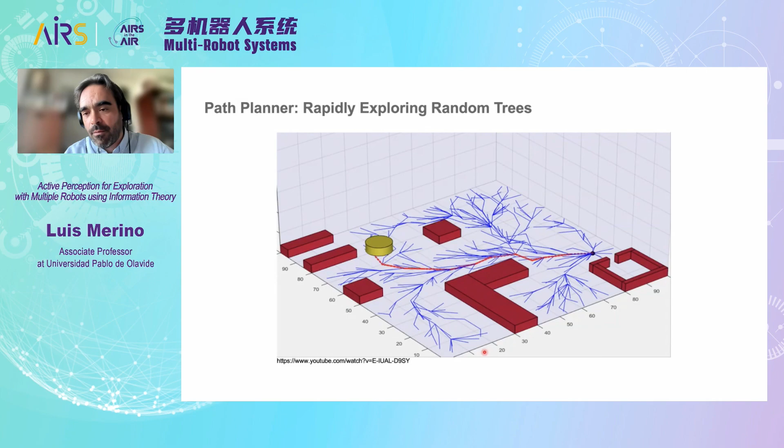We have different possibilities. We can, for instance, use the entropy of the path. With the Gaussian process, we can predict the uncertainty of these positions for each of the paths, and we can compute the entropy of the joint distribution of these new points. This is one possibility. Another possibility is to use mutual information.

Mutual information between two random variables is basically the reduction of entropy on one variable that we get by observing the other variable. So one idea would be to compute the mutual information between the path and the rest of the environment. This mutual information we call here 'non-measure' is the mutual information between the path I will perform and the rest of the environment I have not visited yet. The idea is that if we select the path with the maximum of this mutual information, we will get the path that gives more information about the rest of the space.

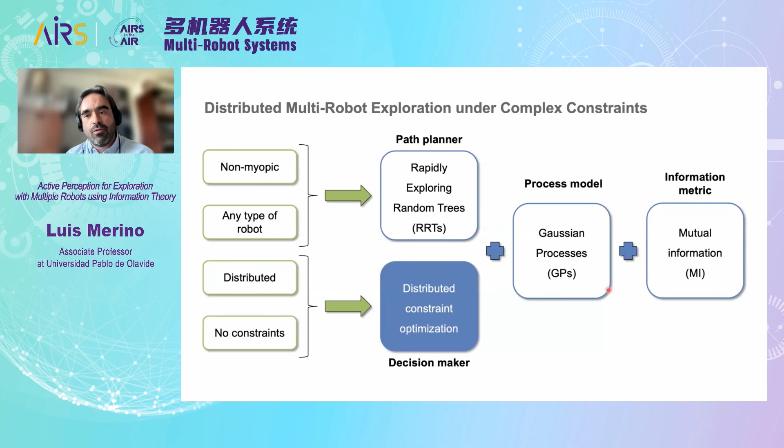Finally, the final component is that we want to take decisions in a decentralized way, and we want to take into account constraints. For that, we use a distributed constraint optimization algorithm, and in particular max-sum, which you may be familiar with—a method to optimize decision variables over factor graphs, which can be applied to multi-robot systems.

Let me give a quick academic example. Imagine you have three robots, and each robot has to decide a color, say blue or red. The idea is to decide the colors in a distributed way so that no neighbor robot selects the same color. So correct decisions would be: red, blue, red, or blue, red, blue. One way to approach this would be to put a utility function that gives very high values when you have a correct solution and very negative values when you have an incorrect solution, and then optimize it.

If this utility function can be decomposed like this into components which only depend on decision variables of a robot and perhaps its neighborhoods, then this could be like the factor graph representation of this function. Max-sum can be applied to this graph. Max-sum is a message passing algorithm, so in a distributed way, just by sending messages through these edges, it can obtain the optimal decision variables D1, D3, and D2.

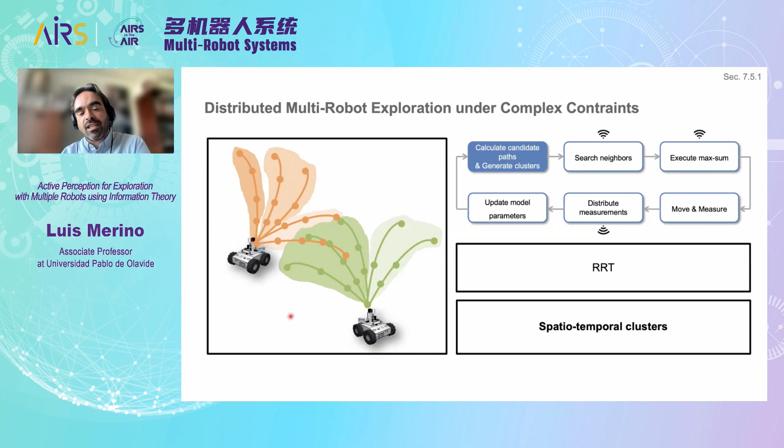So basically, we reduce the distributed decision to the cluster that is selected by each robot. Whenever a robot selects a cluster, later it will select within the cluster the best path from the point of view of the information metric.

The decision for cluster selection between all the robots is done in a decentralized way using max-sum. The utility function we use consists of two components: an information gathering component and another related to the constraints. The information gathering is just the mutual information between the clusters and the whole space I want to explore, and it can be seen under very mild assumptions that this can also be computed in a decentralized way.

The second component is the constraint satisfaction, which we use, as I said before, to avoid collisions between the robots, and also to maintain connectivity within the network.

We actually applied this to a real problem. We had a collaboration with the Australian Centre for Field Robotics in Sydney, Australia, and we used this setup for a fleet of robots to explore thermals. The group of Salah Sukkarieh has been quite interested in soaring, so you have gliders that use these thermals, which offer a vertical component of velocity so that you can gain energy and keep flying more and more time.

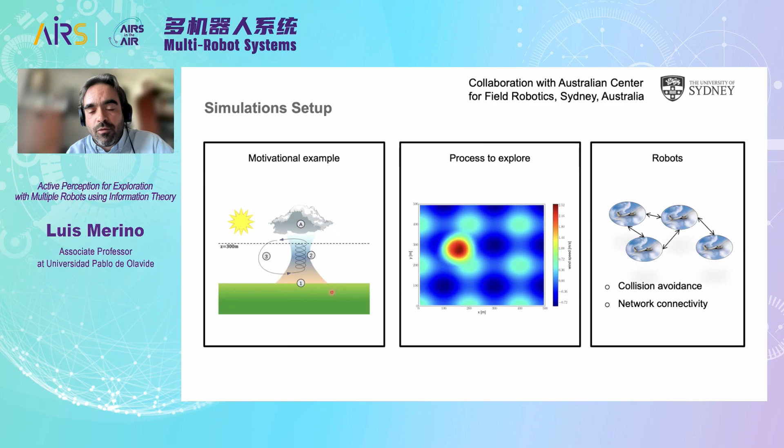For that, you need to detect and map where the thermals are. So we used our Gaussian process and active exploration algorithm to apply to this kind of application: the multi-robot exploration of thermals.

We, of course, did first simulations, and in simulation we used them to see how the algorithm would offer gains in efficiency with respect to other approaches, and the gains are super linear in the number of robots. It means that the more robots you add, the higher the gain you get—it's not just a linear increase in the gains.

Also, with our algorithm, we can attain the constraints a large percentage of the time. Not 100%, because we are softening the constraints, but mainly the network connectivity is the one that is more difficult to maintain. But as we are using a decentralized system, even if you have some disconnections, you can still maintain the system working.

Also, given the decentralization of the algorithm, this scales much better with the number of robots in the network. You can see here this graph, which shows the size of the neighborhood for each robot. In a decentralized system, the computation depends on the size of the neighborhood, not the size of the whole fleet. If you have a fully connected system with everybody sending information to everybody, then you have a linear increase in the neighborhood, which means an exponential increase in the complexity of decision making in each robot.

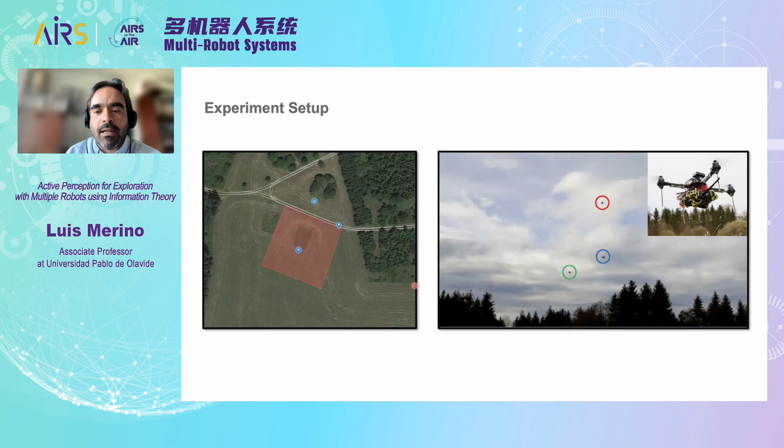And finally, we apply the same thing to real experiments. We fly, in this case, an experiment with three robots in which we wanted to estimate these thermals, and we compare. You can visit those papers in which we report how the method is able to efficiently map the thermals present in the environment.

So, for the sake of time, I will be concluding. As a summary of the talk, I dealt with the problem of multi-robot exploration, which is to take the actions that maximize the robot's information about the environment. It is important for this kind of system, and I think tomorrow you will have additional talks on this, to consider non-myopic approaches, in which planning is involved, and that we are able to handle at the same time inter-robot constraints. The key for scalability and robustness is decentralization.

If we have systems that depend only on local processing and at most local communication, this will lead to systems that are more scalable because the complexity depends only on the size of the neighborhood and not on the size of the whole fleet, but also they are robust against communication dropouts. And for exploration, it's very important to properly analyze the theoretical properties of information metrics, which are key to achieve the objectives.

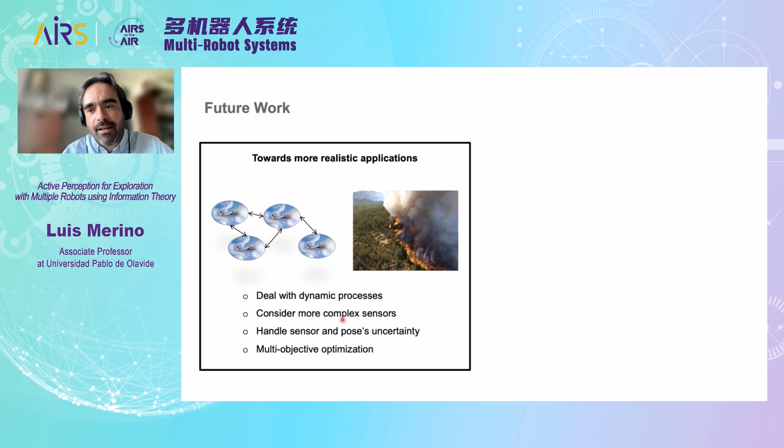Actually, we are following multi-objective optimization approaches because this is by definition a multi-objective problem. We want to also explore this kind of approach and deal with dynamic processes, not only processes that are time invariant. And of course, as it seems everybody else is doing, we are also having a look at learning-based approaches instead of model-based approaches.

Okay, Professor Merino, thank you very much. I want to ask what's your view about deep reinforcement learning? Recently, many works have attempted to apply deep reinforcement learning for multi-robot cooperation. What's your view about their advantages and disadvantages? Do you think it is really possible to apply deep reinforcement learning into real-world applications?

Yeah, in fact, the answer is that yes, you can apply it. My former PhD student Alberto, now in his postdoc, was doing some deep reinforcement learning applied to information gathering. So the answer is yes. I think right now the best approach is a combination of things.

You can use deep learning in general so that you can learn models that help you estimate the information gain of future paths. This can be used to have more powerful models in order to predict how good the information of your plans will be in the future. There are many groups trying these kinds of things with different models, even with reinforcement learning and also with deep learning using attention and things like this. So the answer is, I think, yes, this will be a helpful tool, in particular right now in combination with classical planning approaches as well.